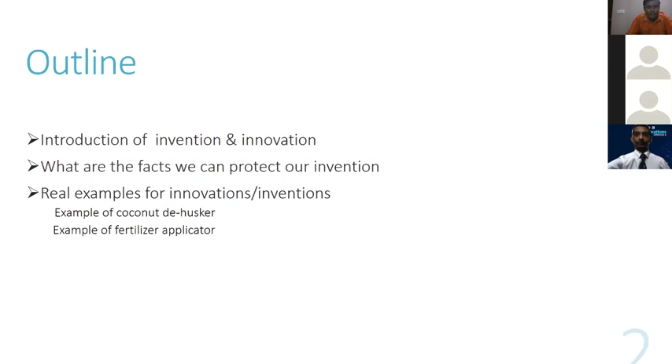Innovation simply means the practical implementation of ideas that results in the introduction of new goods or services, or improvements in offering goods or services. In the simplest way, it's an act of making changes to an existing product or process by introducing new ways or ideas. That is simply the innovation.

Invention is another thing. It refers to the creation of a brand new product or idea. That is invention. I'll explain the difference between invention and innovation. Invention is the occurrence of an idea for a product or process that has never been made before. That means a brand new product.

Innovation means the implementation of an idea for a product or process for the very first time. So, invention is the creation of a new product. But innovation is some value addition to something already existing - adding value to something already existing.

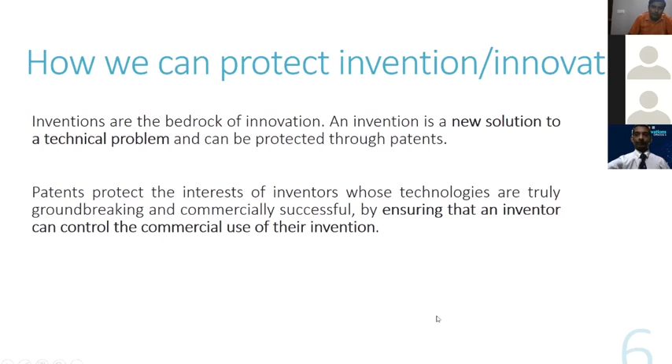There are several facts we need for writing a patent. First, our product should be new - this includes novelty. The claimed subject matter should not be disclosed anywhere in the world, by oral disclosure or written publication. This innovative product should not be disclosed anywhere. If that kind of product already exists anywhere in the world or in another country, we cannot file the patent - meaning our product would not be novel, as it's in the prior art. So our product should be novel, and it should also have inventive steps.

That means it could not be deduced by a person with average knowledge of the technical field. We want a new step, something new compared to others, so that kind of step is required. Also, this product should apply in the industry. So that requirement is there to file the patent.

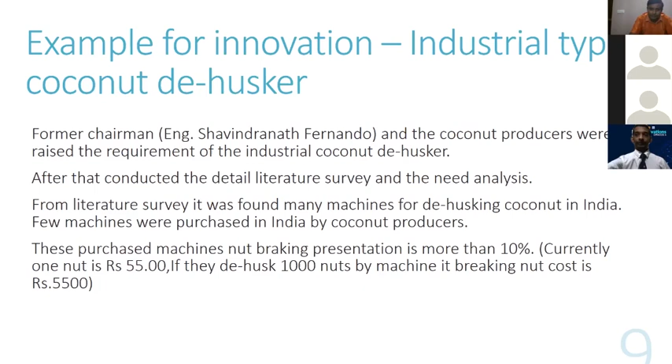From this simple literature survey analysis, first, a man doing manual dehusking can dehusk nearly 200 nuts per hour. Also, there is a simple one developed by the NERDC for domestic purposes. The manual one is used for industrial purposes. These types of machines are developed for domestic purpose, not for industrial purposes.

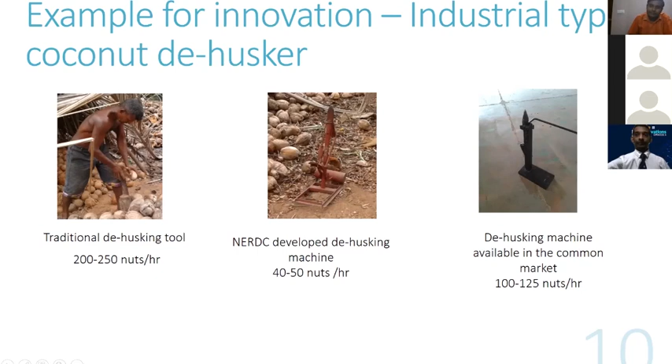That means if we want to remove husks in a house, we can use this kind of husker. This is another husking device. Also we found that there are some in universities - in the University of Moratuwa there is a simple item.

The machine is developed there, and they told us they can dehusk 200 nuts per hour. Also there's a manual machine developed by Rajarata University, and there's one inventor who developed a simple machine - that machine is incorporated with a motor, then the husk is automatically removed.

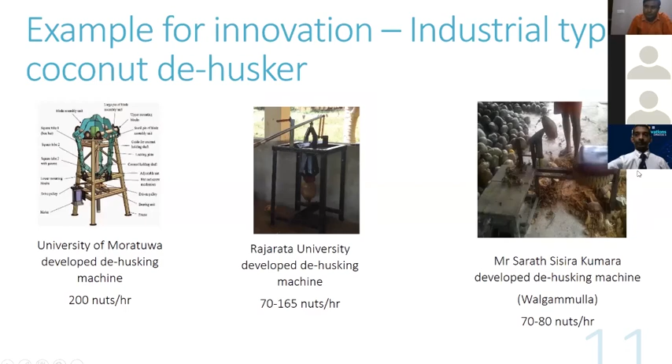But the main disadvantage is we need to press the coconut to that spline to remove the husk. For industrial types, we found mostly two machines. This machine is very simple and its capacity is very low. It is operated by a tractor, but its safety is not much higher. But in Sri Lanka, we found a simple machine imported from India that can dehusk 1,000 nuts per hour.

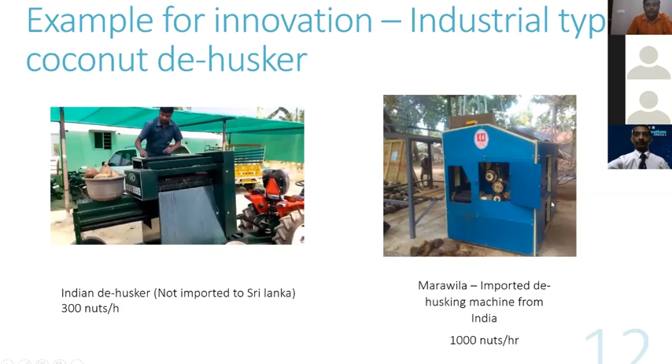Concluding the literature survey, we found that this imported Indian machine is a better machine for dehusking coconut, and it is safer than others. So thinking about that, we decided we want to develop this machine for dehusking coconut. But the thing is, this machine has 10% nut breakage, and also the husk is damaged.

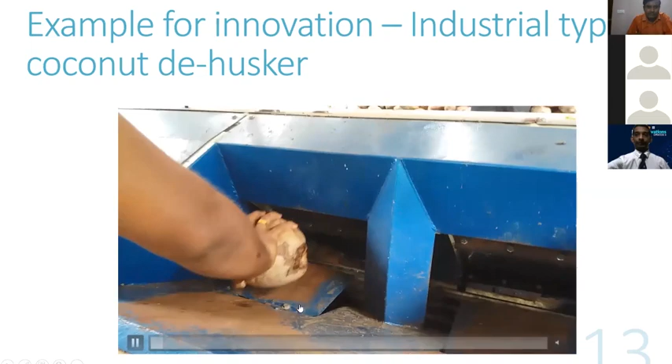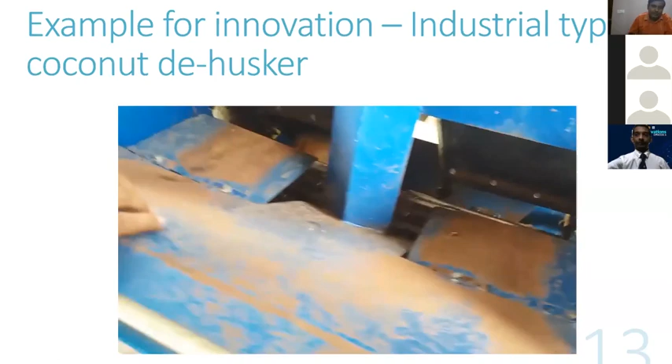This is a simple video, you can see how this Indian machine is operated. Just one person puts the coconut into this chute, then it will dehusk the nut. You can see how fast it is - if we put 2 nuts per 2 chutes, then it will process them. This is how the removed husk quality looks.

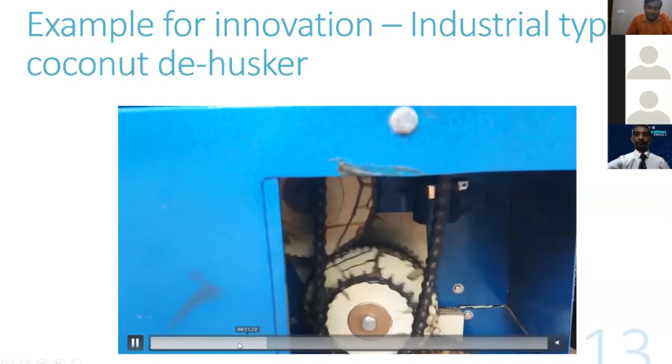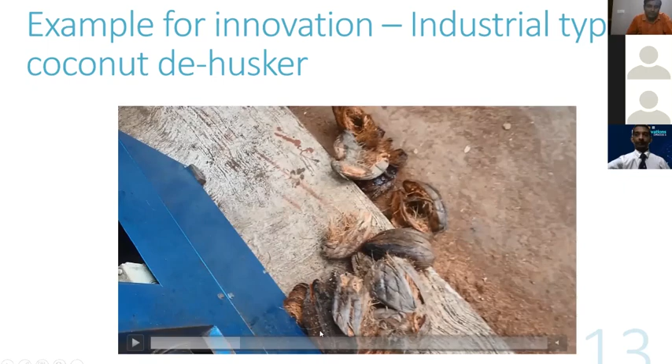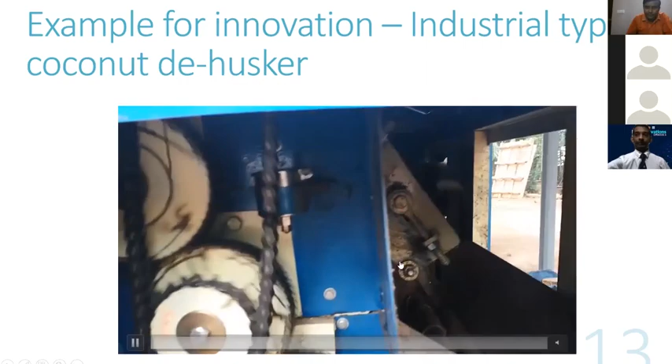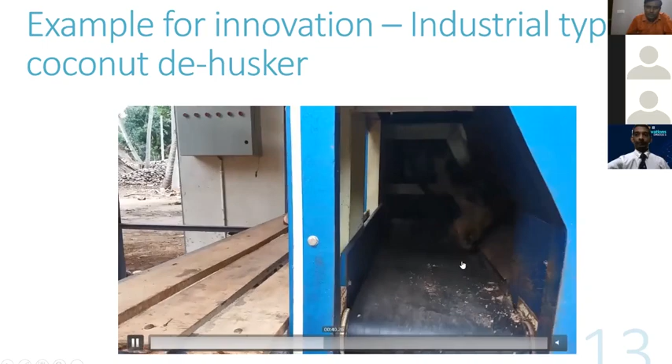This is how they remove the crown. This is the main roller used for removing the husk. In these rollers there are small splines, and there is no significant height to them - the height of the spline is normally half an inch. Due to that configuration, the husk will get damaged.

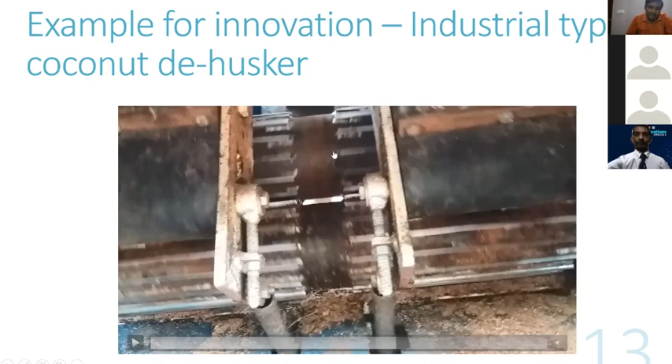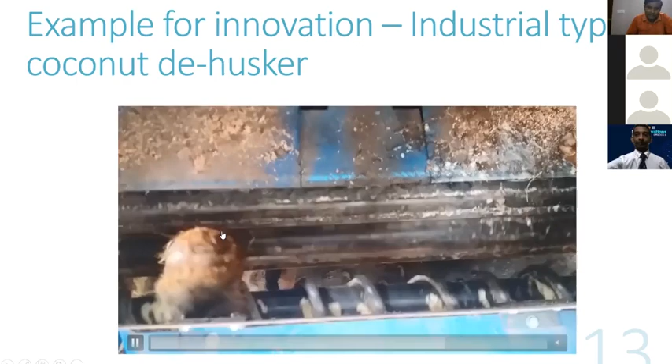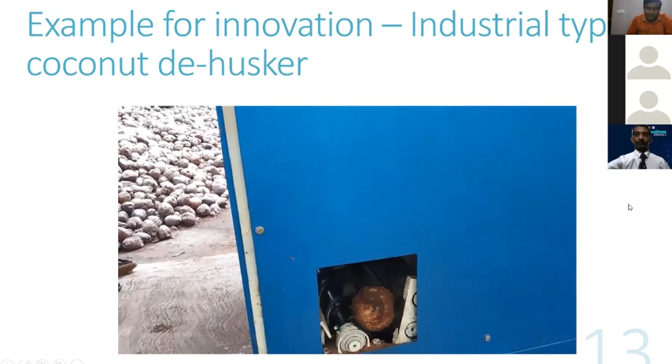This is the crown removing equipment at the downside. The nut comes down and it will remove the crown. But there is a problem in that husk removing equipment to remove the husk. Some nuts come through with the crowns not removed. So these are the problems, and we think we want to improve that husk removing rollers.

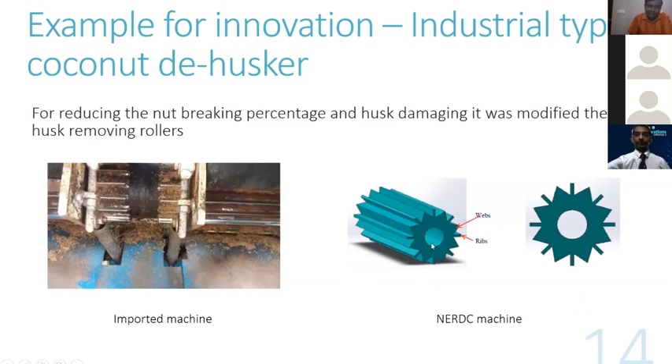This is the husk removing rollers in that Indian machine. We think we want to improve our rollers. We think this kind of roller is good enough because in India the coconut size is normally very small, and they don't use husks to extract bristle fiber, only a small amount. Also their coconut price is much lower than in Sri Lanka. So that Indian machine's performance is good for India, not for Sri Lanka. That's why we improve that Indian machine.

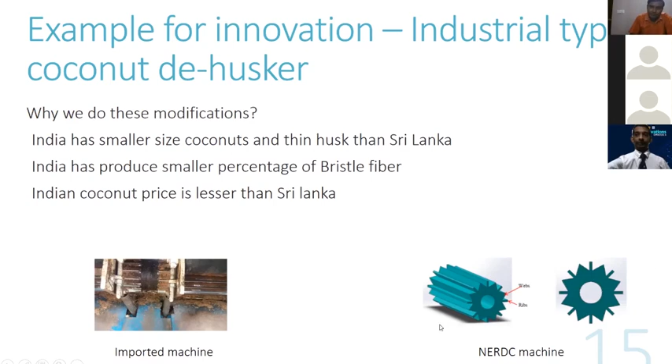So it can work in Sri Lanka. After doing some trials, we found that in Sri Lanka the coconut husk is very thick, and the husk thickness is higher, so we want to increase the height of the splines to remove the husk. Otherwise, if we use smaller, higher splines, the husk will get damaged. That's why we use this kind of mechanism, this kind of rollers, for removing the husk. After doing some trials, we finalized the optimum one for Sri Lankan coconut.

This is a simple sketch of our machine. In this Indian machine, the crown removing item is incorporated with the main de-husking machine. In our one, we separate both. We use the main husk removing machine as one machine, and another machine as the crown removal one, and both are connected by a tray to transport the husk-removed nut to the crown removing item. Also, because we use two machines, the crown removing machine needs to be lengthier than the Indian machine.

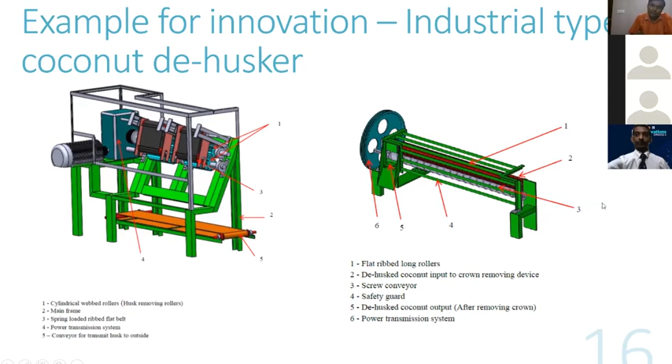Some crowns are very sticky, meaning the crowns are not removed easily, so that's why we want a longer distance, meaning a longer length, for removing the husk.

This is the cross-section of the coconut de-husking machine. The two rollers are there. We put the coconut into this location, and there is a belt mechanism. The belt has simple ribs, and this attachment is spring loaded with this frame. So if we put the coconut into these rollers, due to the spring tension and the rotating moment, the husk is grabbed by these two rollers. Then the nut remains on top of the rollers.

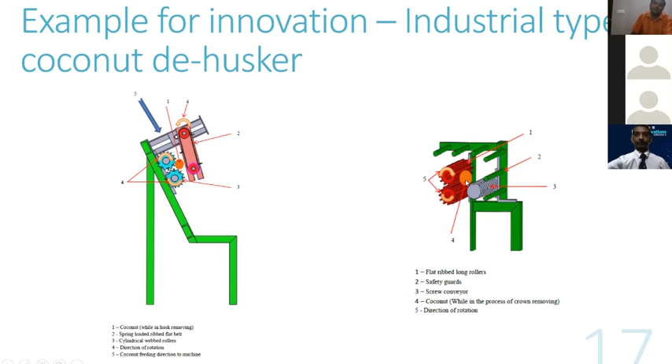If we put another husk into this system, automatically the nut with husk has a higher diameter than the already husk-removed nut. Due to that, this spring-loaded system releases the nut and engages a new nut with husk. This is the process, and this is how we remove the coconut crown. This is the final machine we ended up with in the center.

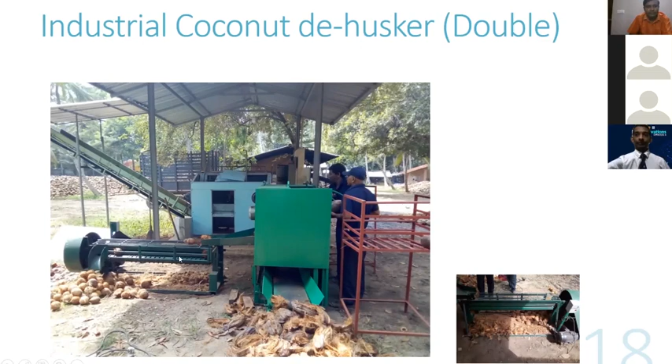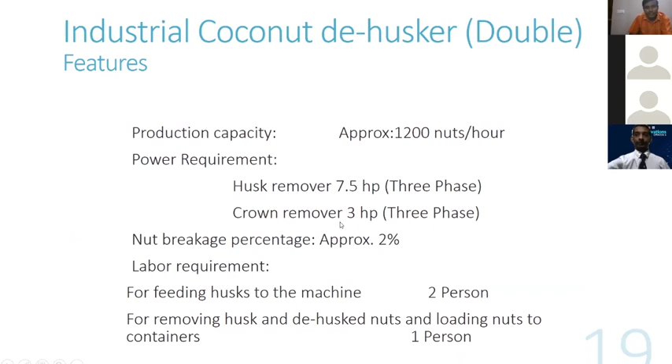This blue color machine is the Indian machine, and this green color one is the Sri Lankan made machine, because we used both machines in the same location, we can compare the outputs of the Indian machine and the Sri Lankan machine. That's why we installed these machines in the same place and compared their performance. After that, we found that we can remove approximately 1200 nuts per hour, and also reduce the nut breaking percentage up to 2%.

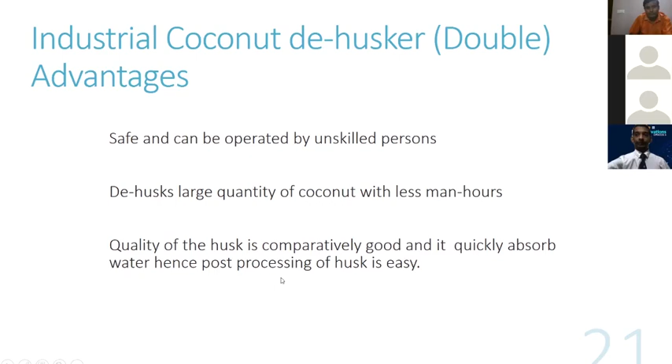There is some general information and some advantages. This machine is very safe and can be operated by unskilled persons. Also, we can de-husk a large quantity of coconut with less man hours. In this machine, we need 2 persons for inputting coconut to the input chutes, and 1 person for loading and unloading coconut to the machine. Also, the quality of the husk is comparatively good, and it quickly absorbs water, hence post-processing of husk is easy.

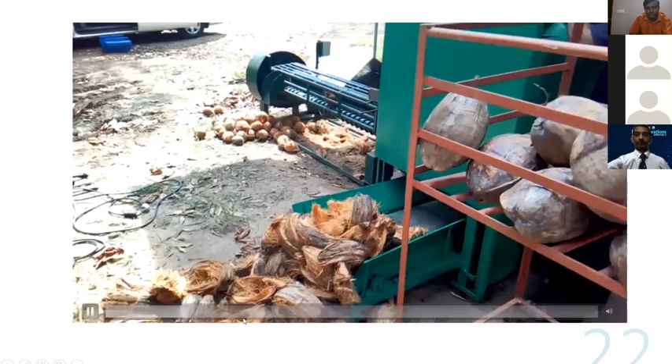This is a simple video. You can see how the machine is working. This is the removed husk. This was done in the first trials.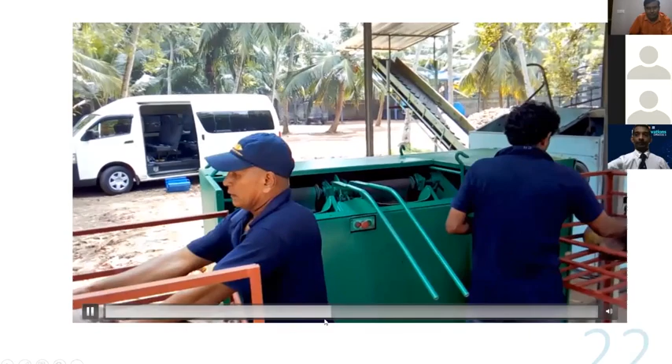You can see how husk is removed by this machine. In this machine we use some safety operations and also several systems there.

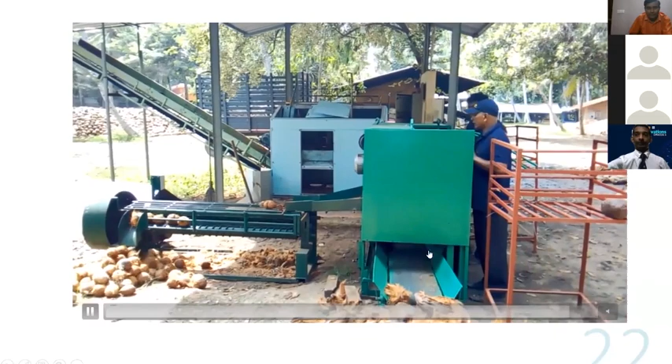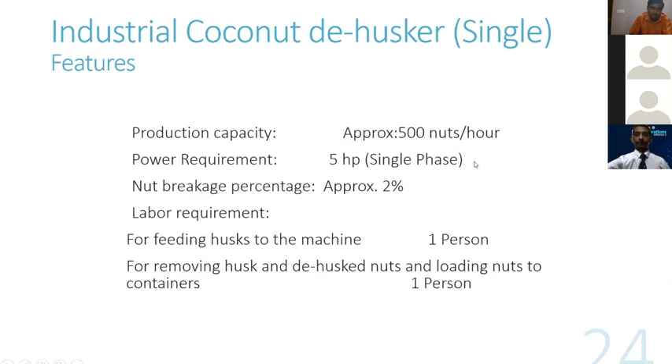After that we developed a single machine with capacity of 500 nuts per hour, and it is used by a single phase. That means this can be used in rural areas or for domestic purposes, for domestic de-husking in rural areas.

I'll use another example to show some innovation. Another one is a fertilizer applicator for coconut estates, operated by a 2-wheel tractor. That requirement came from coconut estate owners with expertise in this sector, along with the Coconut Research Institute and the Coconut Growers Association.

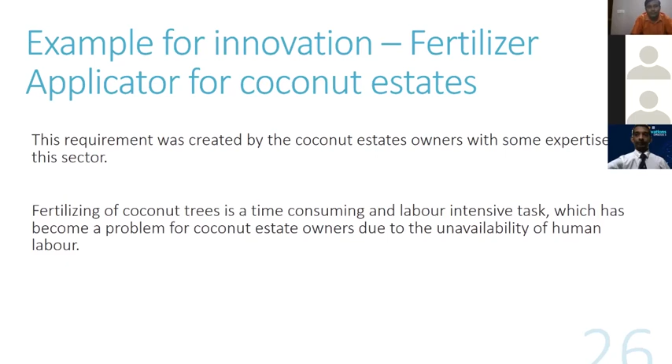We found that requirement, then did the literature survey and need analysis. Fertilizing coconut trees is normally thought to be time consuming and labor intensive, which has become a problem for coconut estate owners due to unavailability of human labor. That's why we developed this coconut fertilizing machine.

Before that, I will explain how we apply fertilizer manually. First, we remove the topsoil of the adjacent area of the plant, to a depth of 6 inches, around a 6 feet diameter circle. Then we apply fertilizer manually, and after that we refill with the removed soil and other debris.

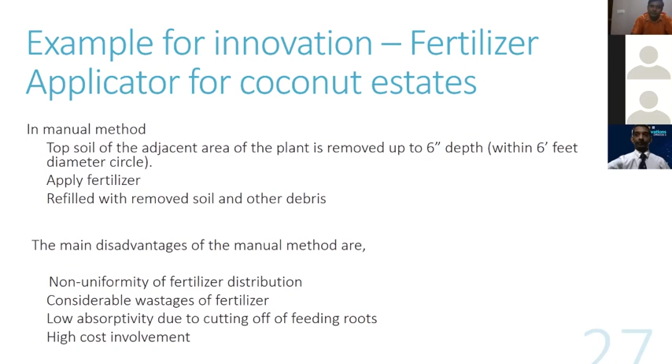In that manual method there are main disadvantages: the fertilizer distribution is non-uniform because it's spread manually around the tree, and wastage is higher. Also, due to the 6 inch depth circle, the feeding roots are damaged, so there is low absorptivity of fertilizer, and the cost is high.

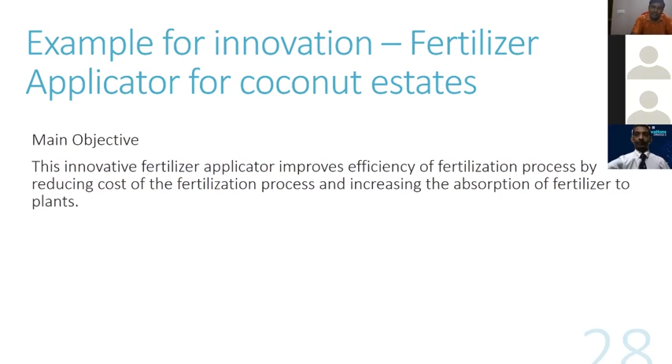So we developed the fertilizing machine, the fertilizer applicator, which improves the efficiency of the fertilization process by reducing the cost and increasing the absorption of fertilizer by plants.

We wanted an attachment to fertilize the coconut tree with an evenly distributed spreading mechanism around the tree. The Coconut Research Institute told us that a tractor rotavator can rotate around the tree at lower depth, rotating soil up to 3 or 4 inches, which is most reliable for the coconut tree.

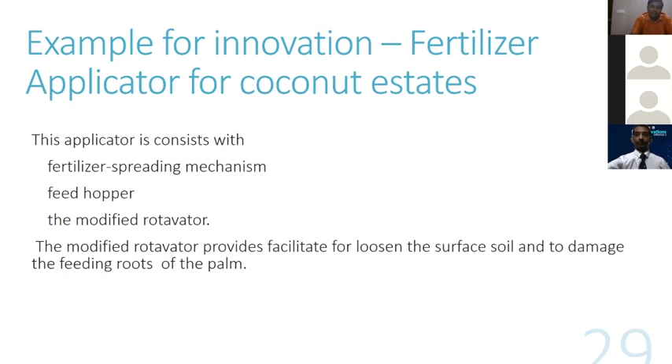So we modified the rotavator of the tractor to loosen the soil surface without damaging the feeding roots. This is the developed fertilizer applicator. The attachment is driven by the PTO shaft of the tractor. We fixed the modified rotavator at the bottom of the frame, and on top of that we included the fertilizer spreading mechanism.

In fresh fertilizer, the chemical fertilizer is like sand, but after absorbing moisture, it becomes mud-like and sticky. So we wanted to distribute both types of fertilizer through this kind of spreader.

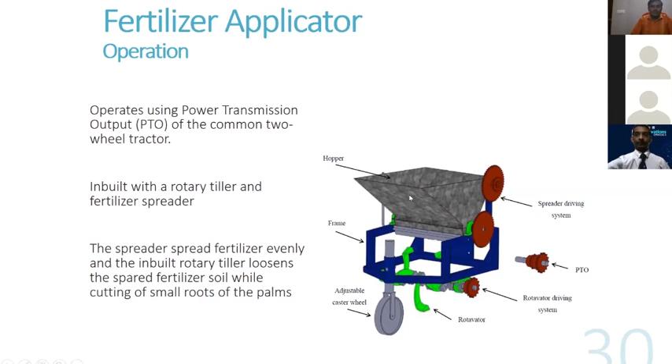We use a cylindrical spreading mechanism, a cylinder with several splines. In the bottom side there's a cover with a simple opening. Along the axis there is a simple chute, and at the top side there is a fertilizer hopper where we fill the fertilizer.

While rotating this cylinder, the fertilizer comes and is discharged through this tube. That is the spreading mechanism, and this mechanism can spread both sticky type and sandy type fertilizer.

Some other systems use screw methods for spreading, but screw methods are not suitable for distributing or transferring fertilizer, because the sticky fertilizer gets stuck in the screws.

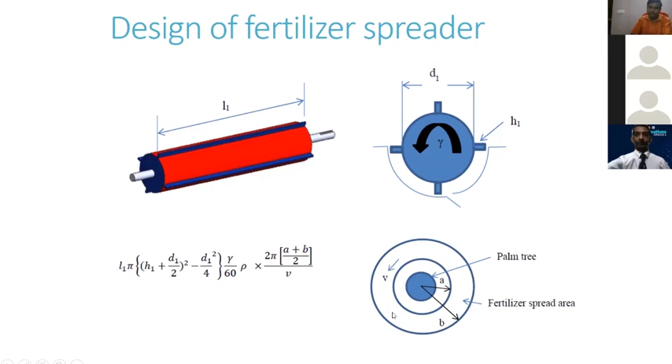This is the final fertilizer applicator. That machine can fertilize a tree in around 2 minutes - the rotavator can go around the tree in less than 2 minutes. The fertilizer hopper holds 50 kg of fertilizer, and we can use several types of tractors, such as a 12 horsepower tractor or a 5 horsepower tractor.

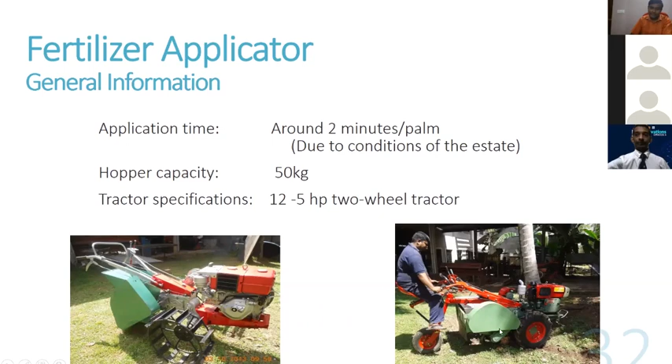We can attach it according to the tractor, and this kind of fertilizer application gives a homogeneous spread. The main benefit is we can spread homogeneously around the tree - in the manual method there is no homogeneity. This machine already spreads a set amount of fertilizer around the tree.

It applies the right quantity of fertilizer and minimizes wastage, applying it in nearly 2 minutes. This rotating mechanism allows high fertilizer absorption, and our hopper can load the required fertilizer for 10 trees, which can result in financial savings.

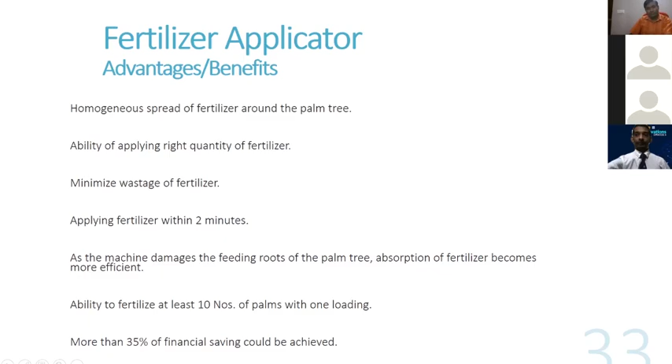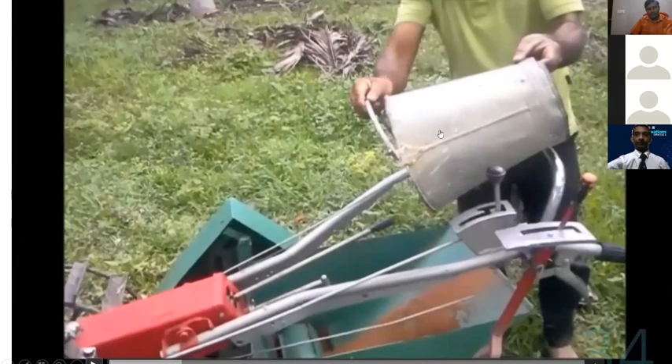This is the video of that machine. For demonstration purposes, we put a small amount of fertilizer into the hopper. Normally we can load 50 kg of fertilizer, since nearly 5 kg is required to distribute for one trip, which is why we load 50 kg.

In this system, there is another lever which operates the fertilizer spreading system. By using this lever, we can stop the fertilizer spreading, and if we switch on this lever, the system can distribute the fertilizer. This is how they apply the fertilizer to the trees.

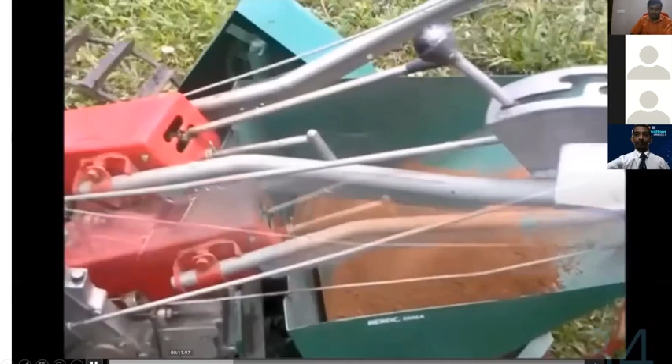This is how the fertilizer is distributed around the tree.

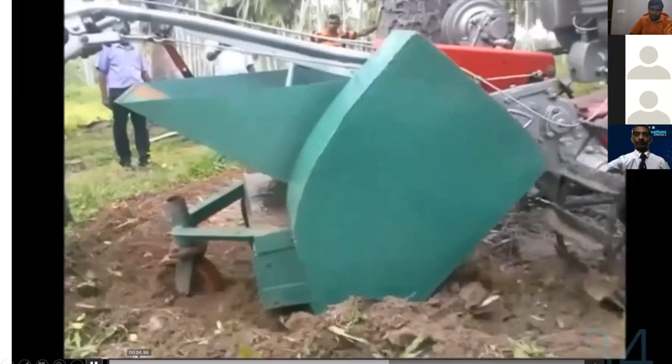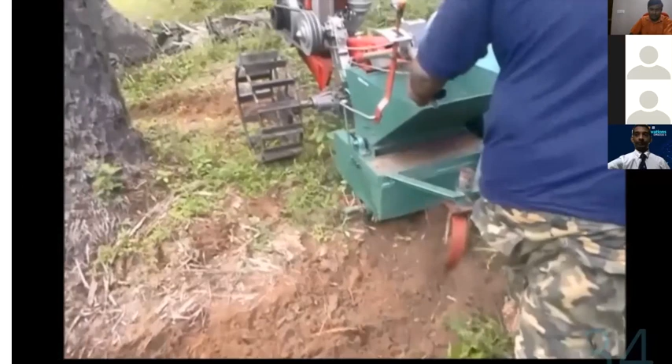In that machine, the normal procedure is first we drive the tractor near the tree, then we switch on the fertilizer spreading mechanism. Then we rotate around the tree to apply the fertilizer. The tractor goes one round, then we switch off the lever, that fertilizer spreading mechanism, because we quantify the correct fertilizer by using the radius of the tree and the tractor speed.

Normally we define that the tractor should drive in low second gear, and the system goes around the tree by nearly 6 feet diameter, so that when the system drives one round, it will distribute only the right amount of fertilizer, nearly 5 kgs of fertilizer.

Then after fertilizing, we switch off the spreading mechanism, then we travel the tractor to another tree. So this is the way of fertilizing the trees.

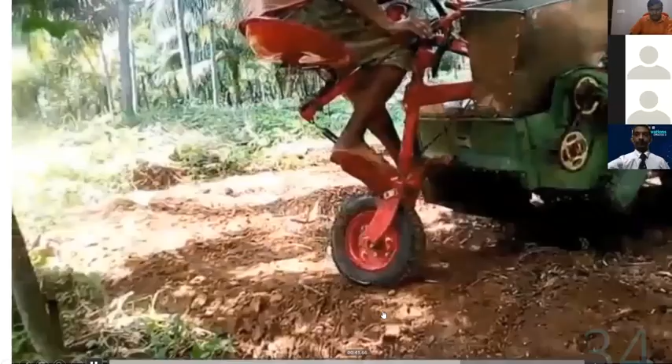This is the 12 horsepower tractor, which is distributing the fertilizer. And with this tractor, we can describe how the fertilizer spreading mechanism is running.

So this is another innovative product in Nerd Center, and that concludes my presentation, thank you. If you have any questions, please raise them.